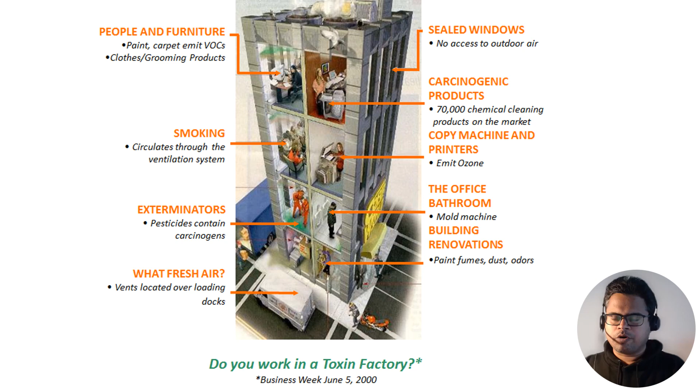And whatever the operational or construction costs of a building, the most valuable resources in a building are its occupants and their performance and well-being, because the ratio of a building's operation cost to the salary of people working inside is about 1 to 40. This is not really a recent realization, as this caption from Business Week about 24 years back points out. Even in 2000, the questions were being asked as to how are our buildings affecting our health and how can we do better? Are our buildings endangering us?

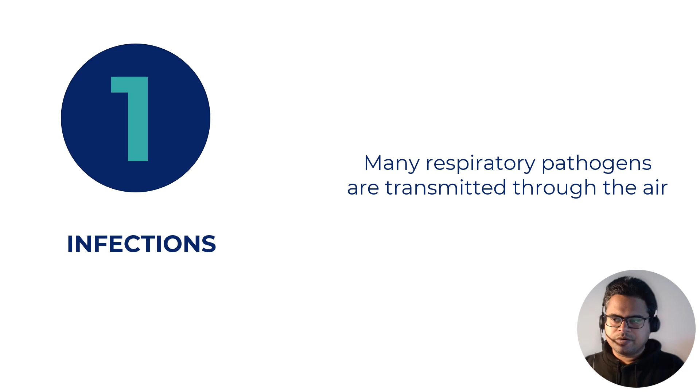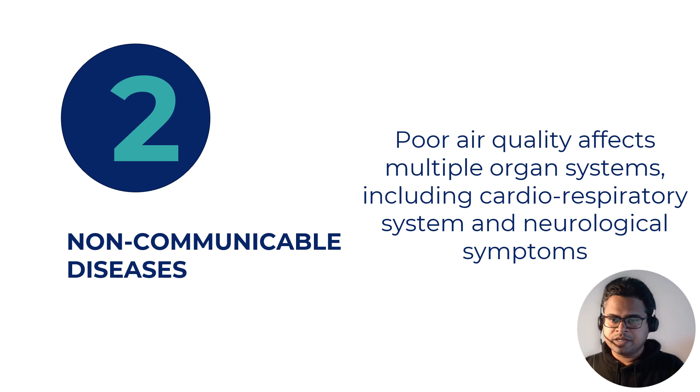Let me just list about 4 reasons why we should care about indoor air quality. One, there are a range of pathogens that are transmitted in stuffy, crowded indoor spaces through the air, including the one that caused the last pandemic. Two, there are a range of non-communicable diseases which are related to indoor air pollutants like particulate matter and volatile organic compounds. They affect multiple organ systems, including our cardiorespiratory systems, brain, skin, and even reproductive system.

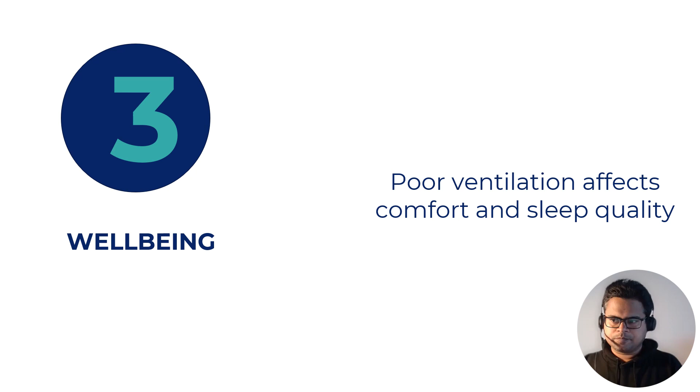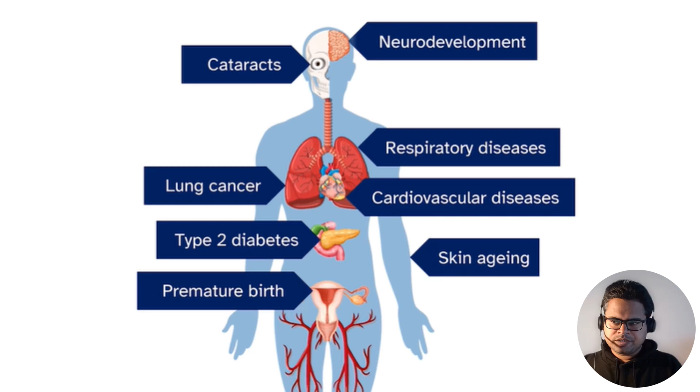Poor ventilation is an often overlooked reason for discomfort and poor sleep quality, which in turn goes on to affect your everyday performance and overall health as well. Good indoor air quality is essential for good working environments or good teaching and learning environments as well. Just to reiterate point number two and how pervasive the impact of indoor air quality is on our health, the impact of indoor air pollutants can be found on virtually all organ systems that you can think of, starting from the tip of your nose to the tip of your toes.

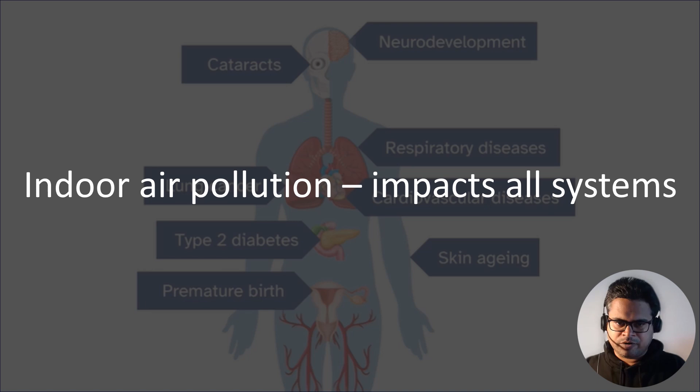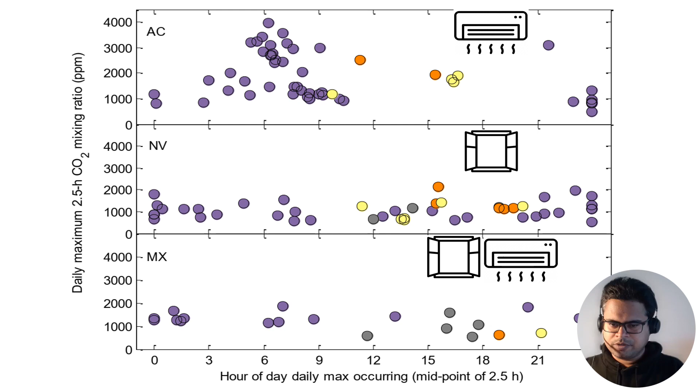So let's look at what some of the studies have shown related to indoor air quality. A study that examined everyday exposure of people to indoor air quality, measuring carbon dioxide levels as a proxy for air quality, found that it depends on the ventilation system being used. Homes using air conditioning had more consistently higher CO2 levels, which implies poor ventilation, and this is particularly during bedtime, that's nighttime.

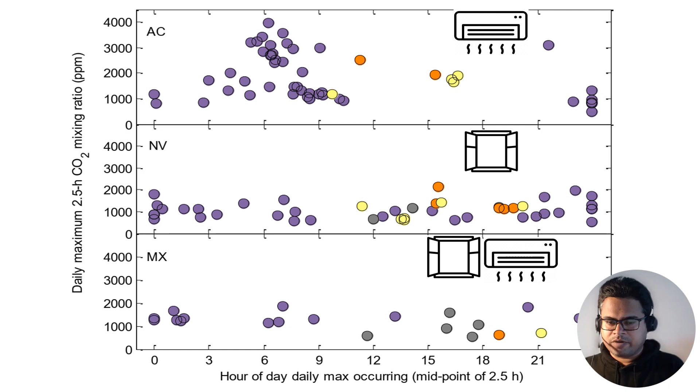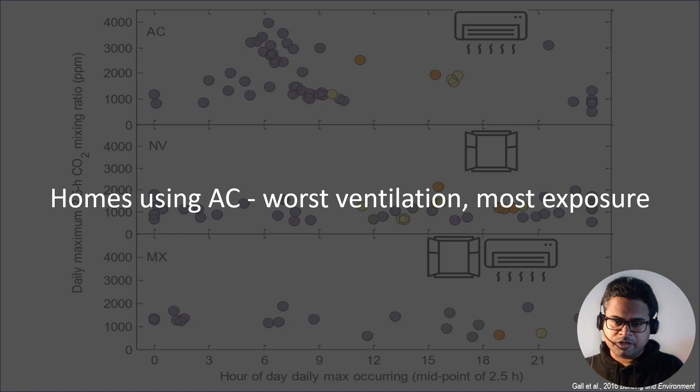Even opening the windows periodically while you're having the air conditioner operating can dramatically improve your air quality. So it's partly about the conditioning system that you have been using, but it's also partly about the awareness amongst people and occupant behavior. Depending on what kind of home you are in, that can increase or reduce your exposures, thus impacting your experience of the space.

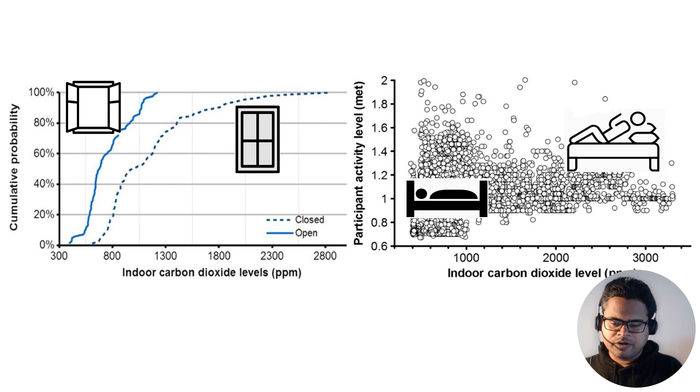Opening doors and windows of bedrooms can have a useful impact on bedroom air quality and consequently improve sleep quality. So this is what we found: whenever CO2 levels were under 1,000 parts per million, sleep was generally more restful, whereas over 1,000 parts per million, you are more than likely to have restless sleep. So that implies the impact of ventilation, which we don't necessarily have to just control by windows opening. We could also do it with doors or windows opening and improve our sleep quality in bedrooms.

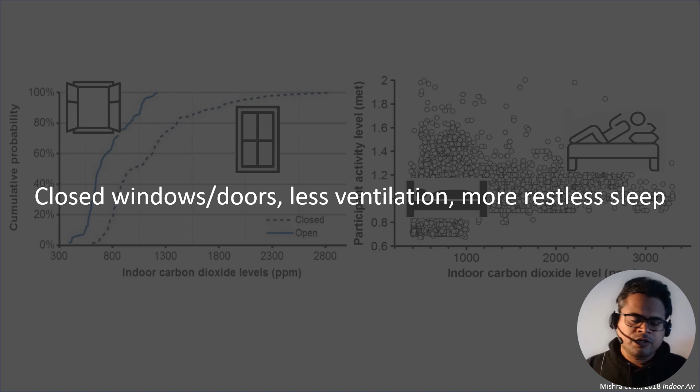Better ventilation and use of low emission building materials has also been associated with improved task performance. Task performance is related to indoor air quality, and it's not just that we need to engage in active energy using measures to design a space with better indoor air quality. There can be passive measures like using lower emission building materials, adhesives, paints, etc., which will improve the indoor air quality and lead to better task performance.

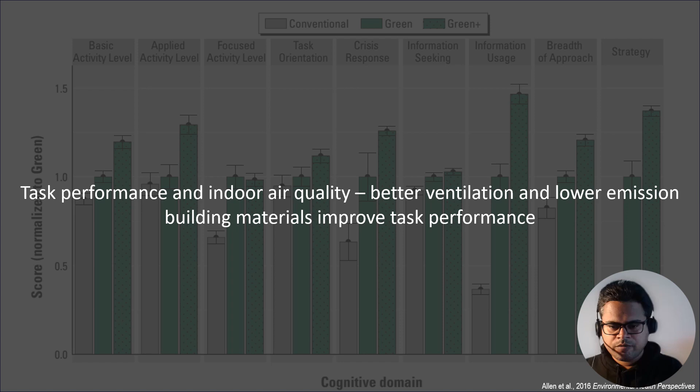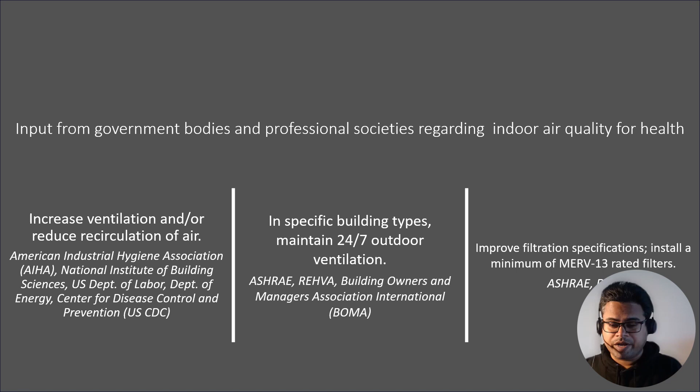The importance of indoor air quality for health is highlighted by not only professional bodies like ASHRAE and REHVA, but also by public health bodies like the CDC and Industrial Hygiene Association. So this is what some of these bodies have said regarding improving ventilation, reducing recirculation of air to lead towards better indoor air quality for health.

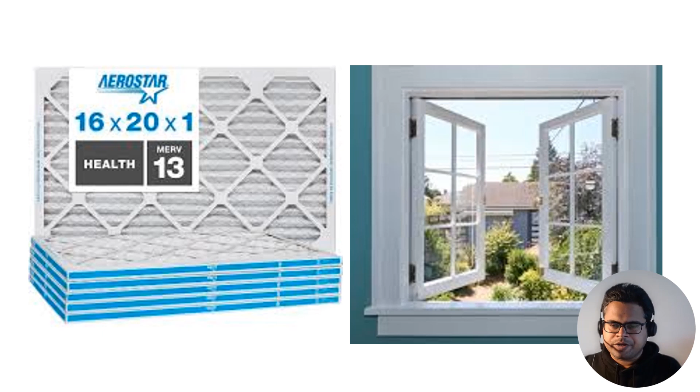In general, when we think of the ideas behind dealing with indoor air pollutants, there are a couple of broad ideas or broad measures behind this. One is either we dilute it through bringing in outdoor air, which hopefully is devoid of those pollutants, and the other is we could remove those pollutants using something like filtration.

So let's think of it in terms of hierarchy of controls. This hierarchy of control relates to risk management, and it can be extrapolated to the risks from indoor air pollution. And as engineers, of course, we can focus on designing and improving buildings to improve indoor spaces, focused on engineering controls. But at the same time, we can also look at measures related to elimination, like using electricity based heating systems instead of fossil fuel based ones. So that's an example of substitution, or elimination could be eliminating the use of adhesives that emit formaldehyde. So that's also part of the design process.

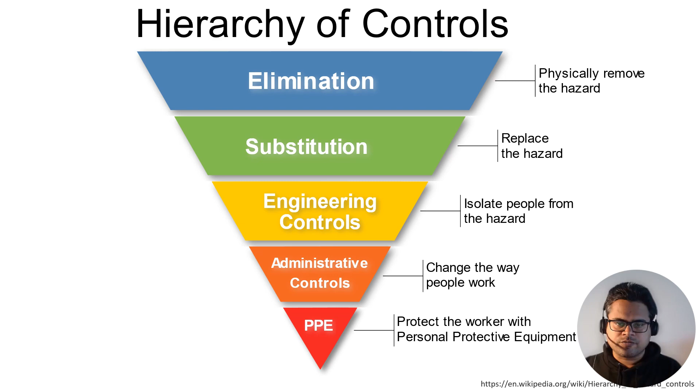Administrative controls could be related to how you operate your building system, building energy system or conditioning system, so that you can take advantage of periods when energy is cheaper. So all of these ideas put together means that engineers can contribute quite a bit, including engineering controls, but even beyond, to lead to healthier indoor spaces.

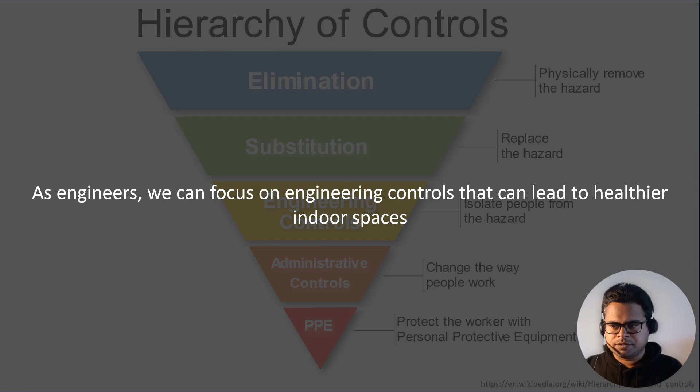Just as a summary, here are a few engineering interventions for healthier indoor air quality. So you can have air cleaning and disinfection within the air conditioning or heating, ventilation, air conditioning systems. You can have UV lamps to kind of kill off some of the pathogens that are found in indoor air. Ventilation is of course there, and it could be mechanical ventilation systems, or it could also be natural ventilation that's encouraged by open windows. You could have a portable air cleaner within the space to kind of capture indoor air pollutants within the space without having the same facility in your HVAC system overall.

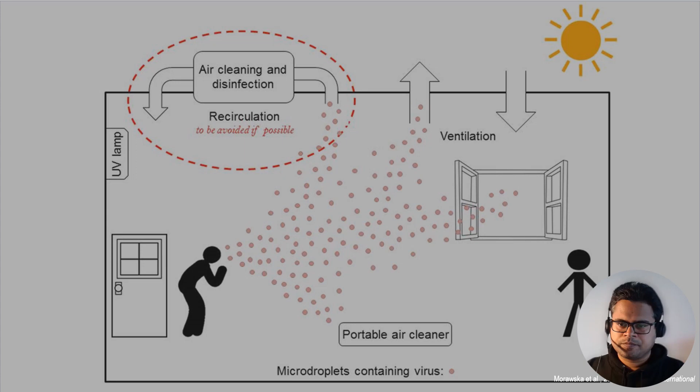So there are a bunch of these measures that are already available. Several others are also being experimented upon and being developed further. So whenever you're designing a building, depending on its purpose, depending on what kind of occupants will be there, like whether they will be vulnerable to certain kinds of exposures, what kind of exposures are expected based on where the building is located, we can always try to design a space with the appropriate engineering controls and interventions for healthier indoor air quality. This is the basic idea behind how engineering can contribute towards this domain of public health and preventing exposures and improving health.

So I had four stories in mind that I wanted to tell that relate to how design innovations have taken place in improving occupant experience of indoor air quality. To start off, I have the smart air filters in mind. It's a company that started off creating very simple solutions to deal with polluted air in cities of China. They have progressed over the past decade to become a very established player in producing air cleaning products. They started off with a very simple design, like you strap on a filter to a fan. The fan sucks air through the filter, and in that process cleans the air.

From that simple design and kind of a modular design, which was useful at that particular moment, so about 9 to 10 years back, it was useful. They have progressed quite a bit. They have been able to leverage technology well to build some of the really nice filters available today in the market, which are quiet, which perform well, which have good air cleaning performance.

Now, this is one of my favorite kind of design interventions that you can think of, because it wasn't started off by some company or some big university. These are called the Corsi Rosenthal boxes, or CR boxes for short. They started off and grew almost entirely as a grassroots movement, where people were creating this simple design, improving upon it, using quieter fans, using different size of filters to ensure that you can fit it in different situations, hanging them up on the ceilings, using them on walls, sitting them on top of each other to make a compact filter design which can deal with larger volumes of airflow.

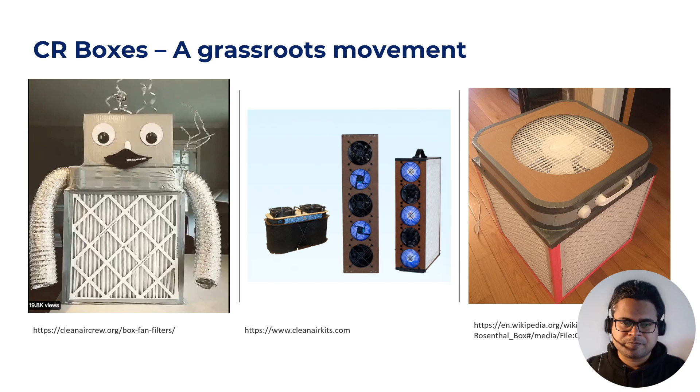As the well-known adage goes, you cannot control that which you cannot measure. Measuring carbon dioxide levels indoors is frequently used as a proxy for indoor air quality and ventilation. It's because it's generally easy enough to measure. The sensor used is not very costly, and we have a nearly consistent reference for outdoor CO2 levels, which is kind of uniform globally, though there might be small variations.

So the Aranet monitors, they came into market with the capacity to measure temperature, humidity, and CO2, providing a reasonable picture of the indoor climate. Their entry kind of coincided with the pandemic and increased awareness among people about indoor air quality, and this helped them to establish themselves. That said, they do make a pretty good product with good firmware updates and consistent performance, ease of use. It has got a great battery life and reliable readings, which has helped them to become very widely used and capture quite a bit of this niche market.

The origami masks release also kind of coincided with the pandemic. It was an interesting design innovation for masks, and its design made it suitable for a wide range of faces, different sizes, different shapes of faces, and it was also easy to store when not in use. That implies easier reuse. Unfortunately, the pandemic also gave rise to this kind of extreme views on masking, and they could not continue the productions. They had to unfortunately shut down.

So, there are this range of solutions that we as engineers could propose for healthier buildings, and we could also innovate. Depends a bit on what kind of products you have in mind, what kind of innovation you're proposing, and also your timing. But overall, let me put it this way. Water sanitation is one of the earliest examples of the interdependence between public health and engineering. As we have come to expect clean drinking water as a part of our everyday life, we propose that we move towards measures of indoor air sanitation so that clean air also becomes a part of our life that we come to accept and expect.

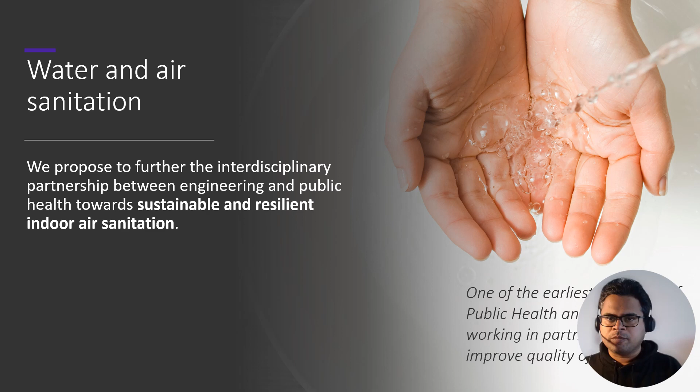To this end, as engineers, we can design and innovate product systems, even controls that can be part of our buildings or even part of a microenvironment around a person. And unlike, say, cars coming out of a factory, which are pretty much all the same, every building is a little different from the others. There are ample opportunities thus available to innovate.

So what's next? There are some challenges for us as researchers and engineers, which could be related to equity of the solutions that we provide and combining energy efficiency and comfort with the requirements of health. There are some challenges for the public as well. As a part of the public, we should be aware and informed occupants, and we should be uncompromising when it comes to health. Thank you very much, and thank you for this opportunity once again.